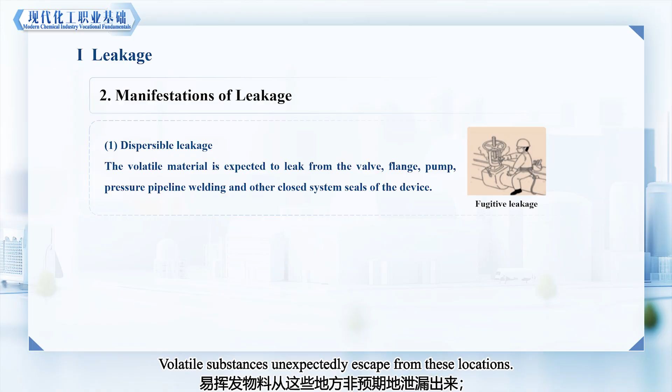The first is fugitive leakage, which typically occurs at sealed points of equipment such as valves, flanges, pumps, or weld joints on pressurized pipelines, where volatile substances unexpectedly escape. The second type is source equipment leakage, where materials are unintentionally and uncontrollably released from tanks, pipelines, vessels, or tank trucks. This type of leak is often an unstructured release.

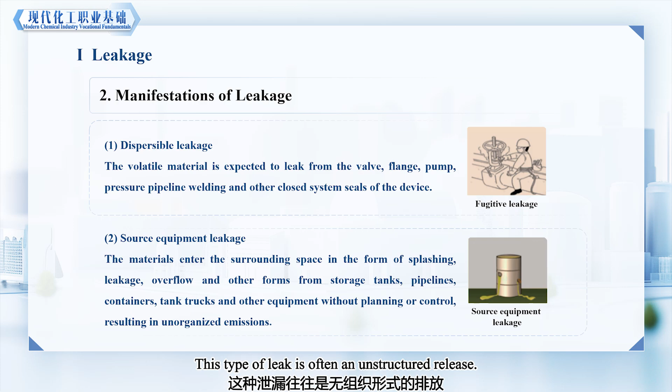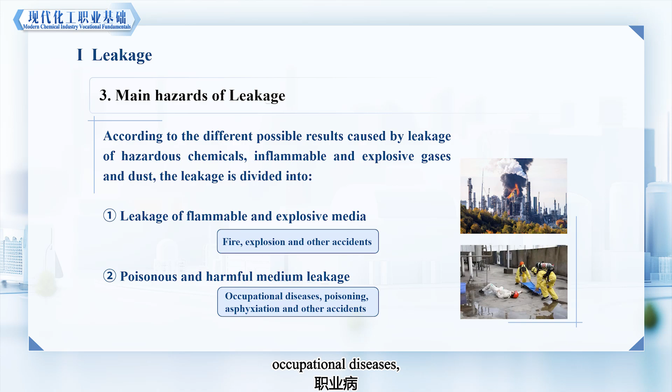The hazards of leaks cannot be ignored. Depending on the type of leaked substance, leaks can be categorized as either flammable and explosive leaks or poisonous and harmful medium leakage. Flammable and explosive leaks may lead to severe incidents such as fires and explosions. Toxic and hazardous leaks may cause occupational diseases, poisoning, suffocation, or even fatalities.

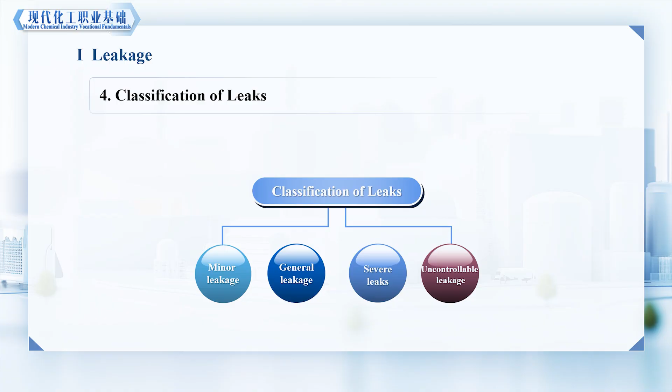To respond effectively to leak incidents, we need to classify leaks by severity. Based on severity levels, leaks are categorized into 4 levels: minor leaks, general leaks, severe leaks, and uncontrollable leaks. Each level has specific characteristics and associated risks.

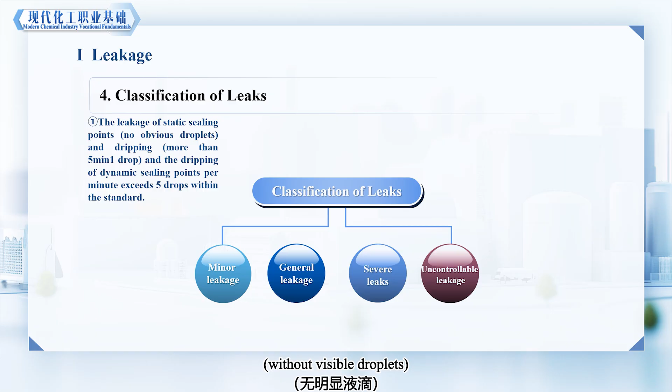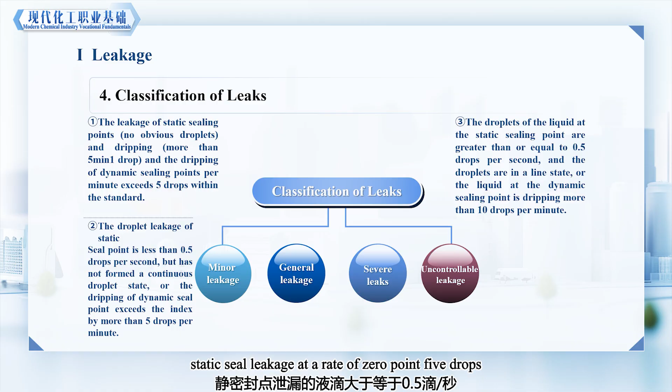For example, a minor leak includes seepage at static seals without visible droplets, dripping leaks of more than 1 drop every 5 minutes, as well as dynamic seal leakage of up to 5 drops per minute. A severe leak refers to static seal leakage at a rate of 0.5 drops per second or more, where the droplets form a continuous stream, or dynamic seal leakage exceeding 10 drops per minute.

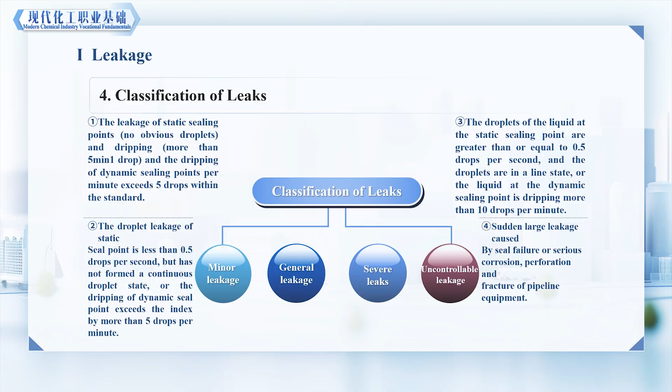Next, we will discuss the general procedures for handling chemical leaks in detail. The process mainly consists of 4 steps: detection, isolation, containment, and decontamination.

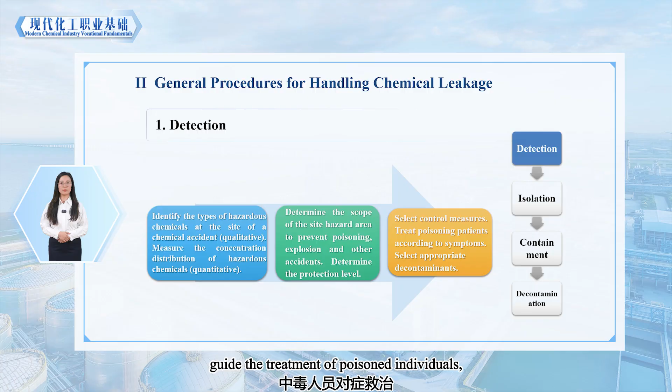Let's start with detection, the first step in responding to chemical disasters. Its purpose is to identify the type of hazardous chemical involved, determine the concentration levels, and establish the hazardous area boundaries and required protection levels. Additionally, detection helps determine appropriate control measures, guide the treatment of poisoned individuals, and select suitable decontamination agents.

There are 2 main methods of detection. The first is instrument testing, which involves sampling and analyzing data using detection instruments to identify the type, concentration, and affected area of the leaked substance.

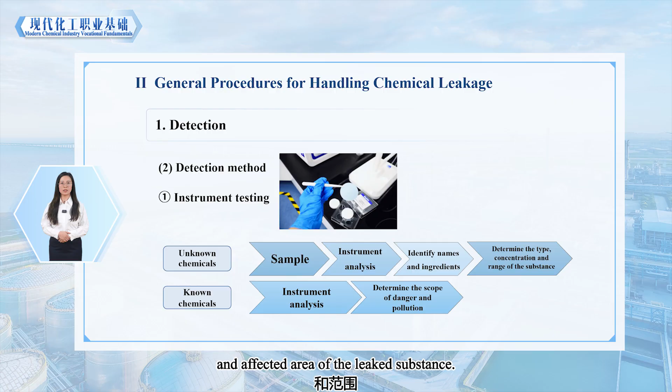The second method is inquiry-based investigation. It involves questioning fixed sources such as managers, technical personnel, and workers, as well as mobile sources such as cargo owners, drivers, and transport experts. This helps gather information about the leak. Additionally, safety data sheets (SDS) and chemical safety labels are used to obtain relevant chemical information.

After a leak occurs, establishing a safety perimeter is a critical measure. The accident site must define hazardous zones based on the extent of chemical dispersion to minimize casualties and prevent secondary disasters. The perimeter should be determined based on the properties and quantity of hazardous chemicals, as well as the geographical and meteorological conditions of the site.

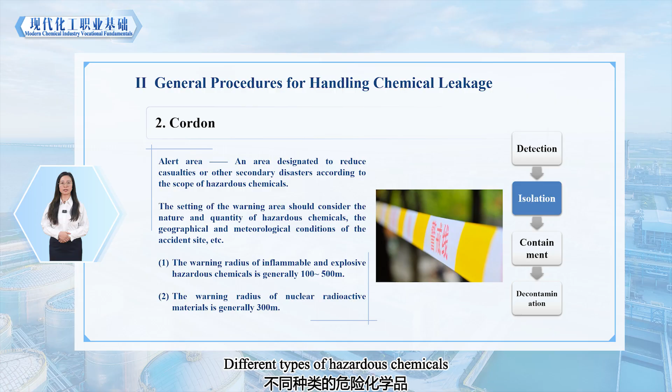Different types of hazardous chemicals require different safety radii. For example, the safety radius for flammable and explosive chemicals typically ranges from 100 to 500 meters, while the radius for radioactive substances is about 300 meters.

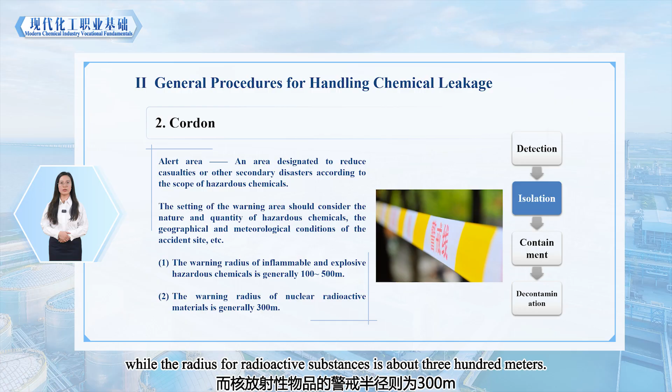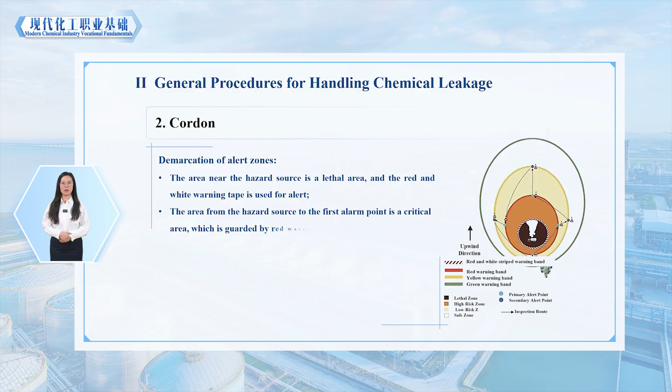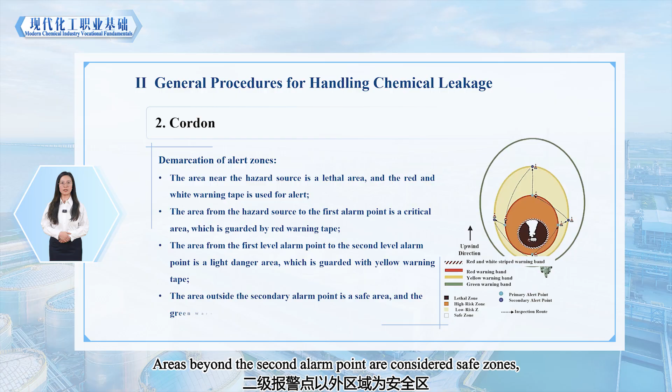Within the safety perimeter, we use different colored safety tapes to indicate different hazard levels. The area near the hazard source is the lethal zone, marked with red and white striped tape. The area between the hazard source and the first alarm point is the high-risk zone, marked with red tape. The area between the first and second alarm points is the low-risk zone, marked with yellow tape. Areas beyond the second alarm point are considered safe zones, marked with green tape.

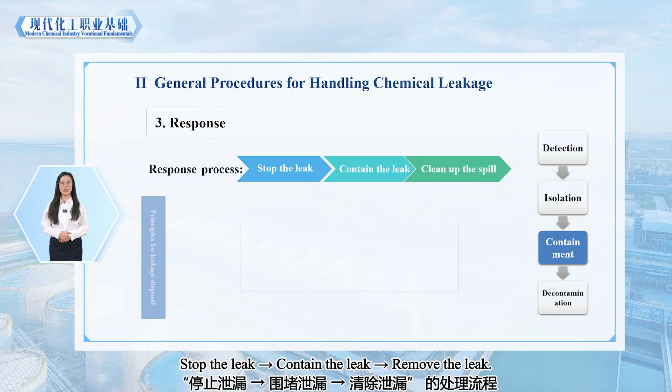The response to leaks follows the principle of stop the leak, contain the leak, remove the leak. During leak handling, the following points should be noted: first, stop the leak source and rescue personnel. Personnel entering the hazard zone must wear proper protective gear. If the leaked substance is flammable, all ignition sources in the contaminated area must be eliminated immediately.

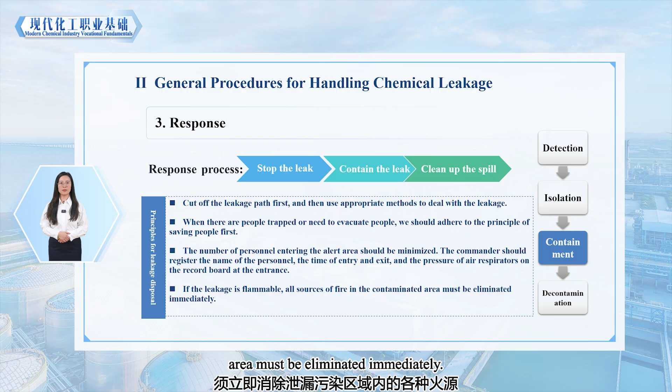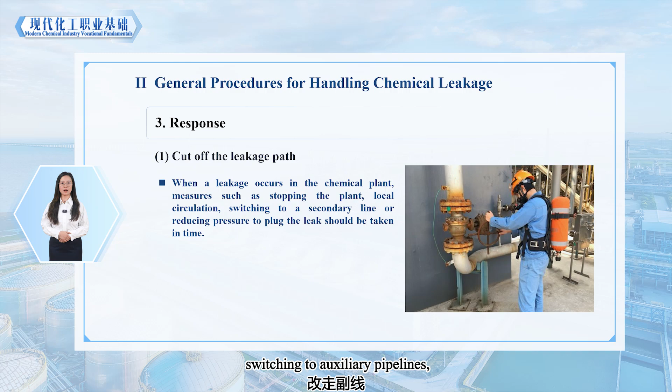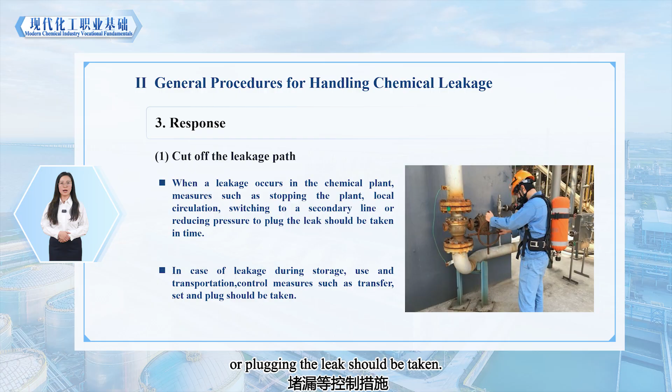The leak source must be stopped first. If a chemical unit is leaking, emergency measures such as shutdown, recirculation, switching to auxiliary pipelines, or depressurization should be implemented. For leaks occurring during storage, use, or transportation, measures such as transferring materials, containment, or plugging the leak should be taken. Next, we need to select an appropriate handling method based on the leak's physical state and severity.

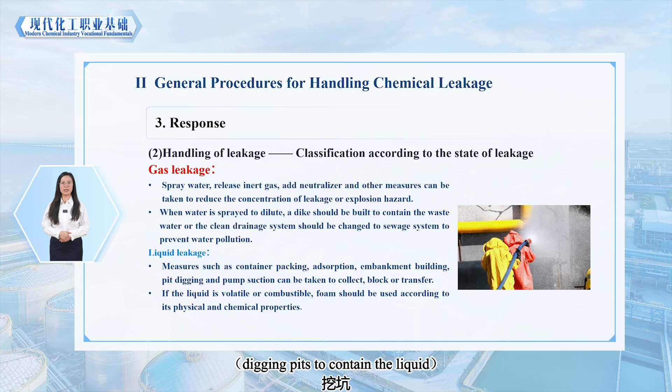For gas leaks, the following measures can be used: spray mist water, release inert gas, or neutralize harmful gases. For liquid leaks, the following measures can be used: collecting in containers, using absorbents, constructing dikes to contain spread, digging pits to contain the liquid, and using pumps to remove spilled liquid.

When handling leaks, different response strategies should be applied depending on the leak volume. Small-scale and large-scale leaks require different handling approaches.

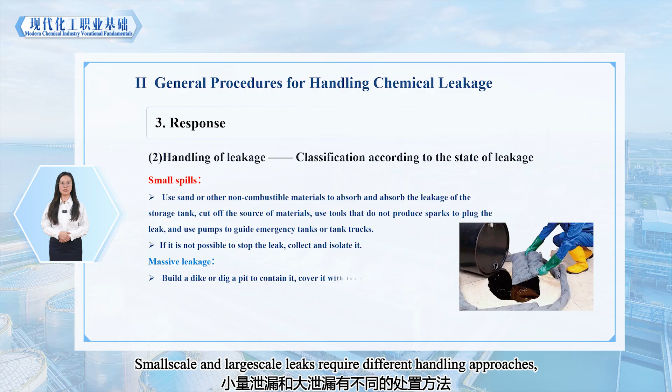To ensure both safety and environmental protection, decontamination mainly involves cleaning personnel and equipment within the hazardous area to eliminate the impact of hazardous chemicals on people and tools.

Decontamination must be carried out in designated decontamination stations or tents at exit points. Residual decontamination fluids must be collected and disposed of properly to prevent secondary contamination. The decontamination process must be repeated until monitoring confirms that no contamination remains.

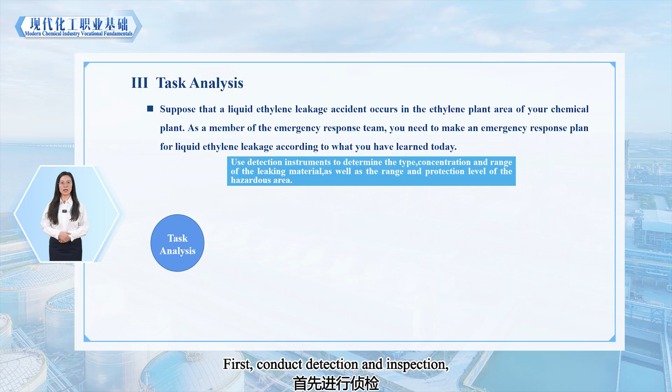Now let's revisit the initial task assigned at the beginning. Suppose a liquid ethylene leak occurs in the ethylene unit of your chemical plant. How should you respond? First, conduct detection and inspection using professional monitoring instruments to determine the type, concentration, and extent of the leaked substance, as well as the hazardous zone boundaries and required protection levels. Then, based on the detection results, establish a security perimeter and deploy color-coded barrier tapes and warning signs.

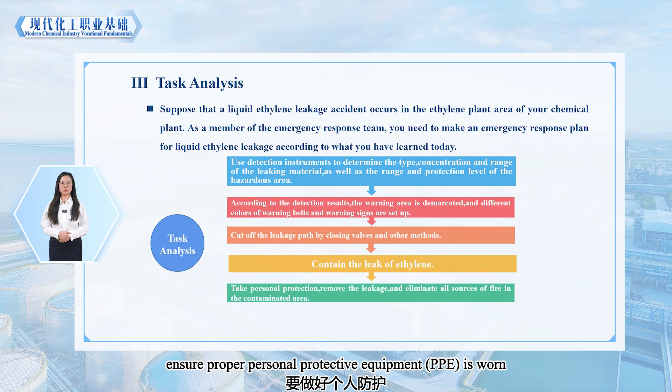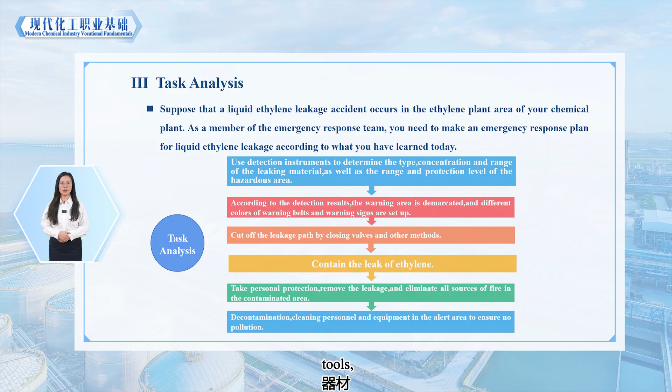Next, proceed to the response phase. First, cut off the leakage source, then contain the spilled ethylene, and finally remove the leaked material. During the operation, ensure proper personal protective equipment (PPE) is worn and eliminate all ignition sources within the contaminated area. Finally, conduct decontamination, thoroughly cleaning all personnel, tools, and equipment within the secured zone to ensure no residual contamination.

Next, we will watch a video to learn about the handling of liquid ethylene leaks.

Liquid leakage. In the actual ethylene production process, various liquid leakage phenomena may occur. Common liquid leakages include cooling circulating water leakage, green oil leakage, and liquid ethylene leakage, and so on. This micro-lecture takes liquid ethylene leakage as an example to explain the causes, phenomena, and emergency treatment methods of liquid ethylene leakage.

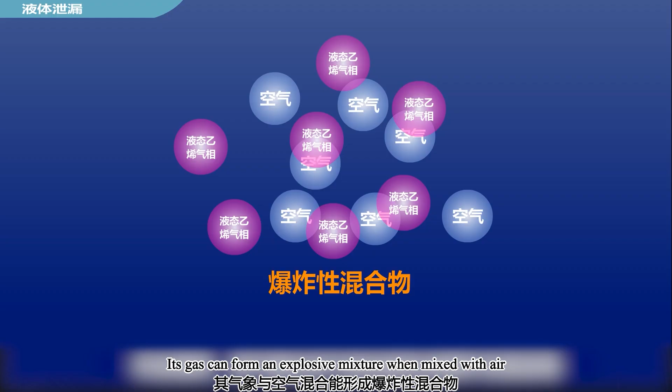Liquid ethylene, with the chemical formula C2H4, is a colorless liquefied gas with a slight odor typical of hydrocarbons. It burns with a bright flame and emits black smoke. The flash evaporation and heat absorption of liquid ethylene can cause skin frostbite, and it is flammable. Its gas can form an explosive mixture when mixed with air, posing a risk of combustion and explosion in the presence of heat sources and open flames.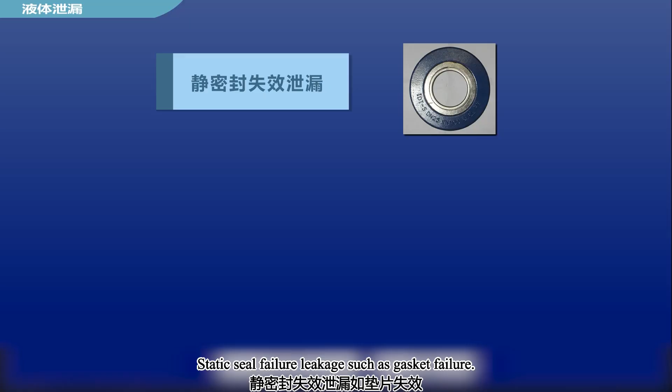Inhalation of high concentrations of ethylene can immediately cause loss of consciousness. The causes of liquid ethylene leakage are mainly divided into three categories: static seal failure leakage, such as gasket failure; dynamic seal failure leakage, such as mechanical seal failure; and fault leakage, such as pipeline corrosion, and so on.

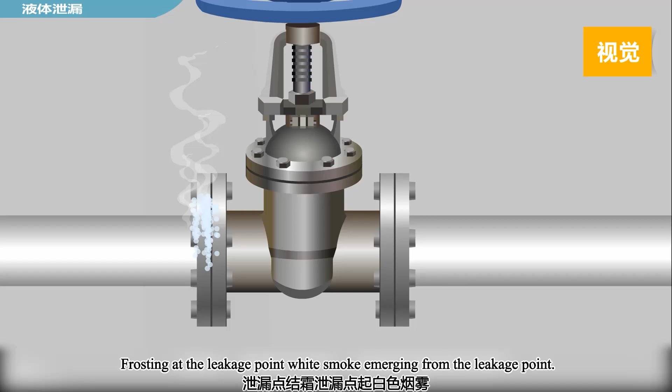The leakage of liquid ethylene can be judged from the following aspects: olfaction, unpleasant odor; vision, frosting at the leakage point, white smoke emerging from the leakage point; hearing, leakage sound; monitoring, acoustic and optical alarms from the combustible gas alarm. When a liquid ethylene leakage accident occurs, the treatment should be carried out according to whether it causes a fire.

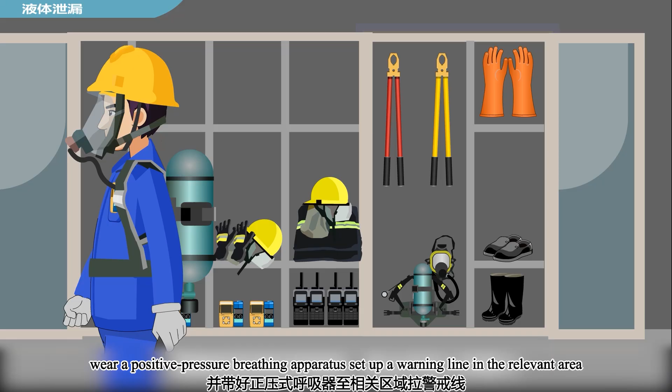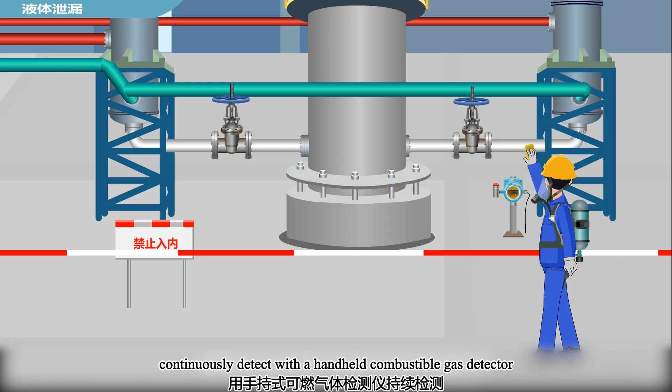When there is no flame and the leakage amount is small and acceptable, the field operator should report to the superior, wearing a positive pressure breathing apparatus, set up a warning line in the relevant area to prevent unauthorized personnel from entering. Continuously detect with a handheld combustible gas detector and wait for further arrangements.

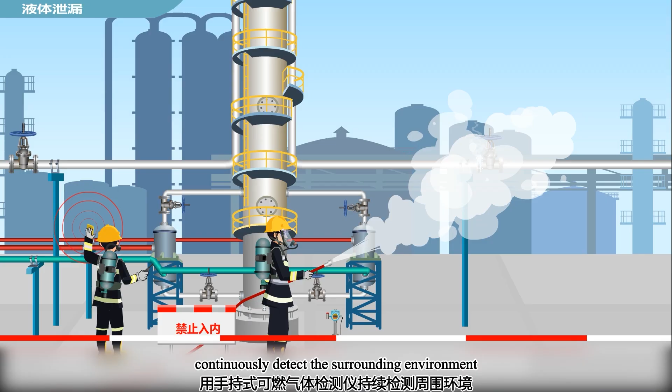When there is no flame but the leakage amount is large and unacceptable, the field operator should keep a safe distance from the leakage point and not handle it blindly, as combustion or explosion may occur at any time. The field operator should wear a positive pressure breathing apparatus and fire-resistant clothing, and continuously detect the surrounding environment with a handheld combustible gas detector.

Use a steam hose to purge and dilute the leakage point on site, to form an inert environment, control the impact range, and report to the superior. Arrange for the leakage system to be shut down and isolated, and after pressure relief and passivation, cut off the material at the leakage point and wait for further arrangements.

When there is a flame and the fire is controllable, keep a safe distance from the leakage point and do not handle it blindly. Report to the superior, start the emergency plan, have firefighting forces on standby, and arrange for the leakage system to be shut down, isolated, and passivated.

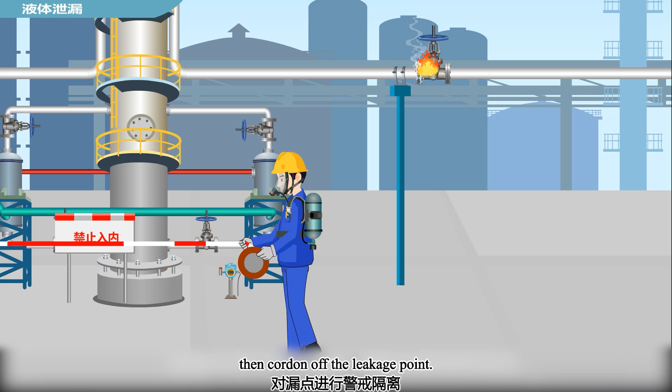Then cordon off the leakage point. Maintain positive pressure throughout the isolation period. The field operator should wear a positive pressure breathing apparatus and fire-resistant clothing. After the flame extinguishes by itself, purge and dilute the leakage point to form an inert environment, control the impact range, set up a warning line in the relevant area to prevent unauthorized personnel from entering, and wait for further arrangements.

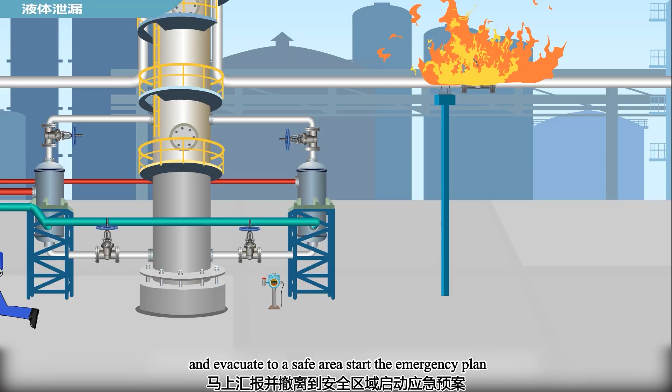When there is a flame but the fire is uncontrollable, this situation is a fire. Immediately report and evacuate to a safe area. Start the emergency plan, evacuate personnel, and call 119. The factory should be shut down urgently to prevent the fire from spreading further, and cooperate with firefighting forces in rescue operations.

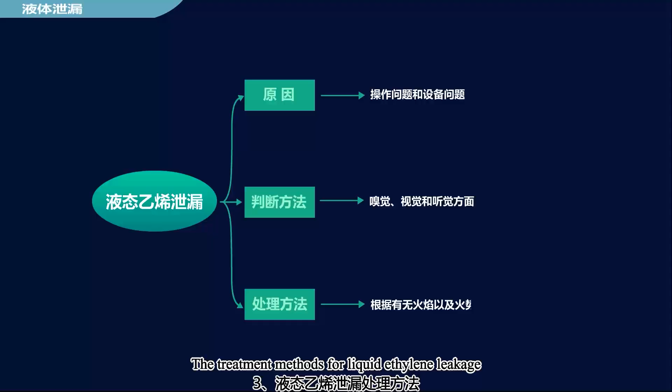This concludes the study of this micro lecture. Let's summarize the key points. First, the causes of liquid ethylene leakage are mainly considered from two aspects: operational problems and equipment problems. Second, the judgment of liquid ethylene leakage is carried out from the aspects of olfaction, vision, and hearing. Third, the treatment methods for liquid ethylene leakage are respectively handled according to whether there is a flame after the leakage and whether the fire is controllable.

Today, we covered the definition, types, major hazards, and classification of leaks, as well as the general procedure for handling chemical leaks. I hope you internalize this knowledge and apply it in practice so that you can respond quickly and effectively to chemical leaks in the future. Thank you all for listening and participating. I hope today's lesson provides you with useful knowledge and guidance on emergency response to chemical leaks.